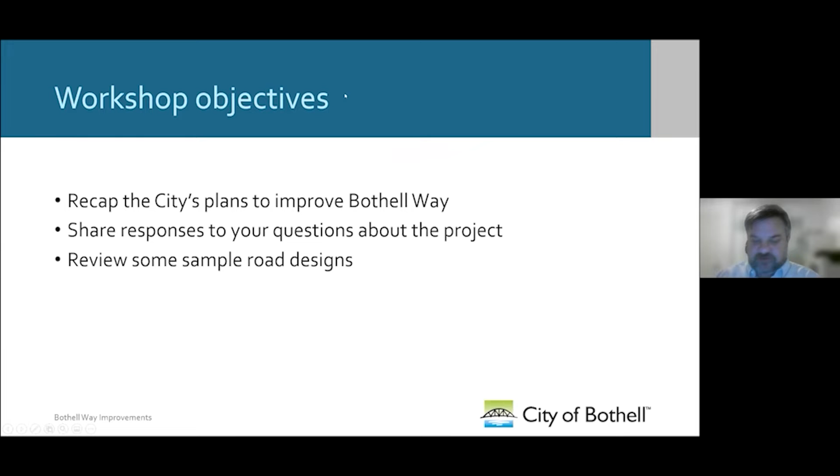Let's start with you, Jack. Good evening. Hi, and welcome to our second workshop on the Bothell Way Improvements project. Thanks for joining us. We are still somewhat early in the design process, but we do have some updates that we'd like to share with you.

We'll report back on some of the questions that we heard in the first workshop and share some of the reasons for the project, some sample roadway designs, a timeline for planning, and eventually construction.

This is our second workshop. There were some great questions in our first workshop in February. Today, we'd like to share some more answers to those questions that were asked. If we don't answer all your questions, don't worry. There are still more opportunities to ask us about the project at the end of today's presentation and in a few months in our online open house.

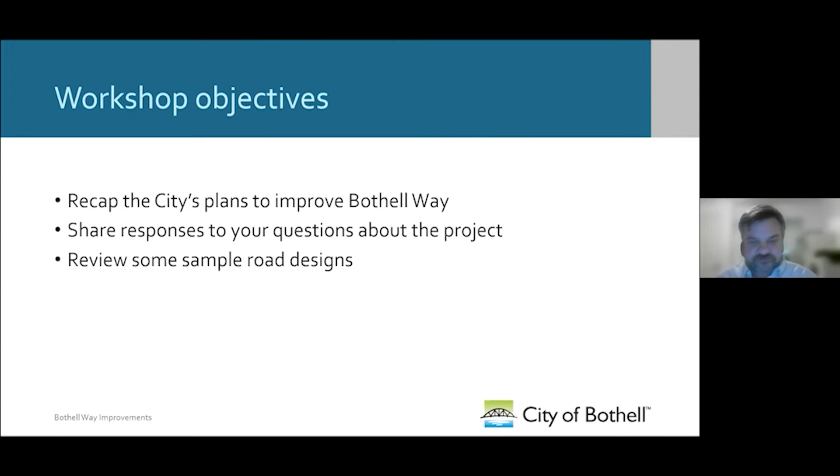As you know, Bothell Way is an important north-south connection between Snohomish and King counties. It links commercial and residential districts throughout our region, including Canyon Park and downtown Bothell, and then on to Northgate, Kirkland, UW-Bothell, and many other communities. These are the regional centers for employment and housing, and they're growing.

You've probably seen the improvements that the City of Bothell has made to provide a safer downtown for shoppers and residents, adding sidewalks, signage, and bike lanes. We hope to do the same for the residents and businesses in this section of Bothell Way too.

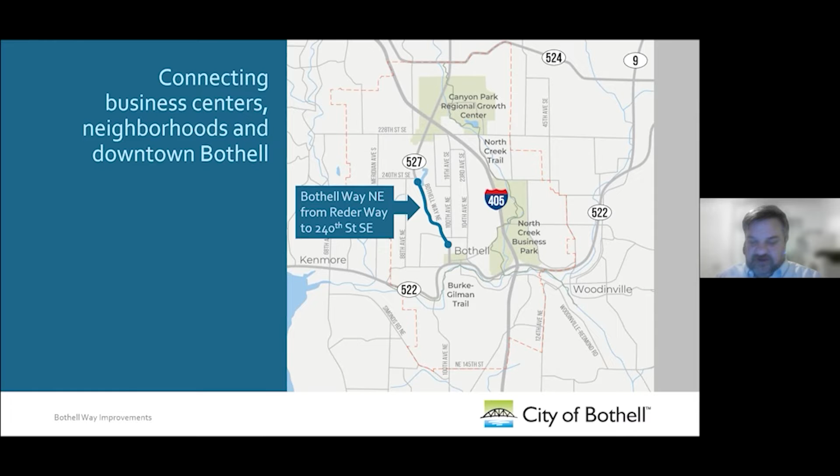With that, I'd like to hand it off to our project manager, Ross French, to update you on the current planning process. Thanks, Jack. Since the last workshop, we've been looking more closely at the current traffic counts, the road capacity, and area growth. Forecasts predict that car traffic volumes will double along this section of Bothell Way by 2040.

Housing growth continues throughout the region as well, and that includes this section of Bothell Way. But unlike some other Bothell neighborhoods, families in these neighborhoods don't have a safe way to get downtown from Canyon Park without using their cars. We've heard from parents whose kids would love to pedal over to visit friends in a different neighborhood, but there is not currently a safe way to do that. This project will provide safe access for them and everyone else who travels this road.

The Bothell Way Improvements Project will also help businesses, making it easier for customers to safely access buildings and parking, regardless of their mode of transportation. The next slide, please.

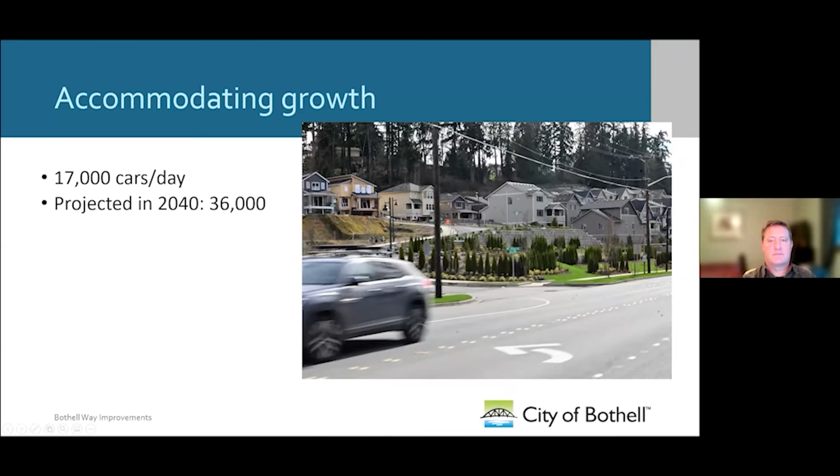The current road design blocks fish. We're currently in discussions with the Tulalip and Muckleshoot tribes and the Department of Fish and Wildlife to ensure the new road design permits fish to swim through the creek.

We plan to improve wetlands next to Bothell Way as well. Fish passageways will be designed so that small animals can also pass under the road.

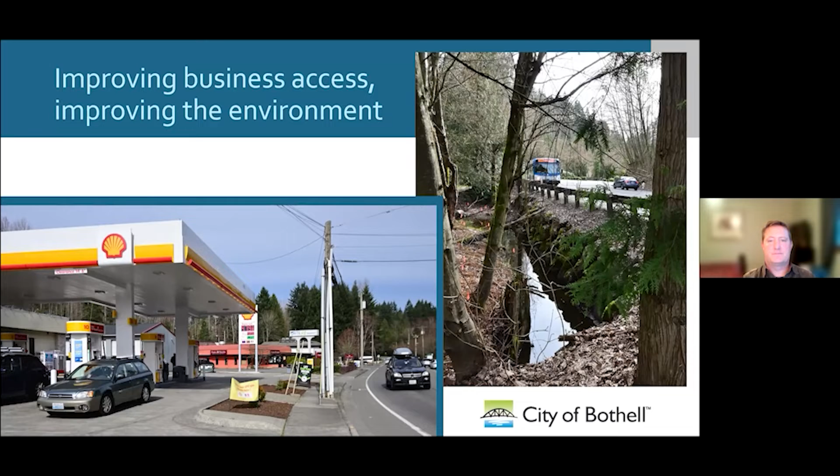This project will improve the bus system for the region by adding bus rapid transit, or BRT, along the corridor. BRT is a bus system that acts somewhat like a train. It comes more frequently and reliably than conventional buses and allows riders to enter anywhere along the bus. BRT is a very efficient way of moving a lot of people along a major transit route.

Community Transit's Swift Green Line BRT runs from Seaway Transit Center to Canyon Park Park and Ride. It runs every 10 minutes on weekdays and every 15 minutes on weekends, connecting Everett, Mill Creek, and Bothell.

As part of this project, we plan to extend the Swift line to downtown Bothell, upgrade signals and lane markings to help buses move through traffic, and make commutes better for all users.

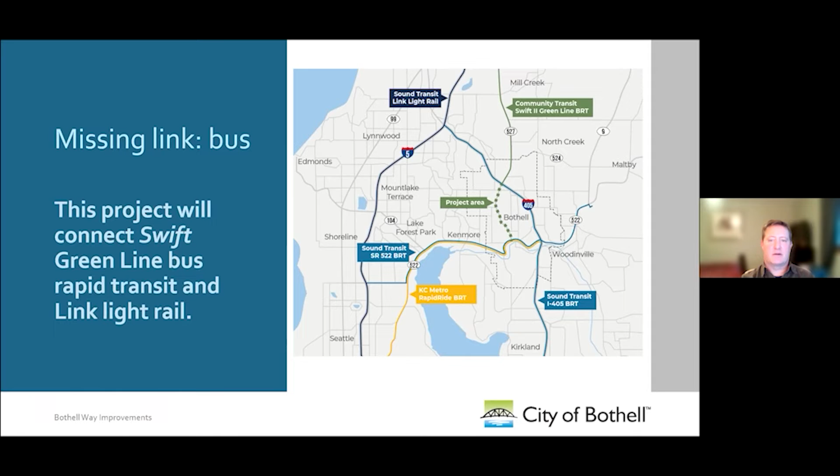Through these early conversations, we've heard some terrific questions from the public and wanted to address some of them here. You asked about the curves in this section of Bothell Way, when construction will take place, about lighting and landscaping, and what other amenities you can expect. Let's tackle those now.

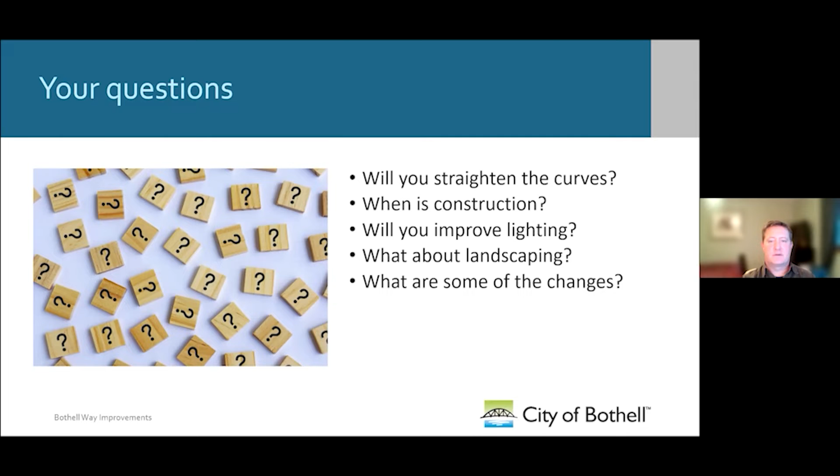We're also planning to not move the road much so that we stay clear of the wetlands to the west side of Bothell Way.

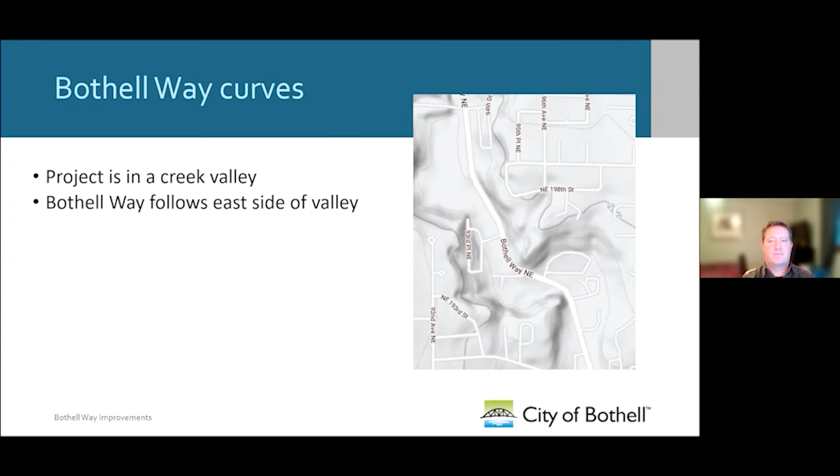So our construction timeline is phase 1 and 2, currently scheduled to begin construction in November or December 2025, ending in fall of 2027. Phase 3, or the middle section, will begin construction in November or December of 2027, ending in fall of 2029.

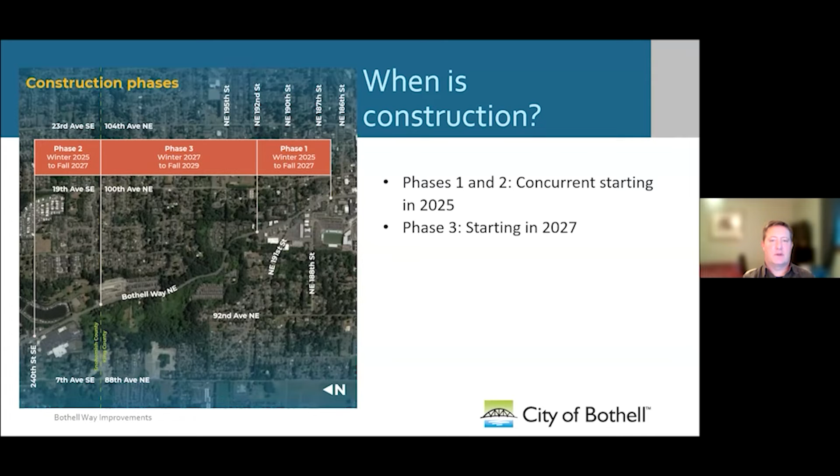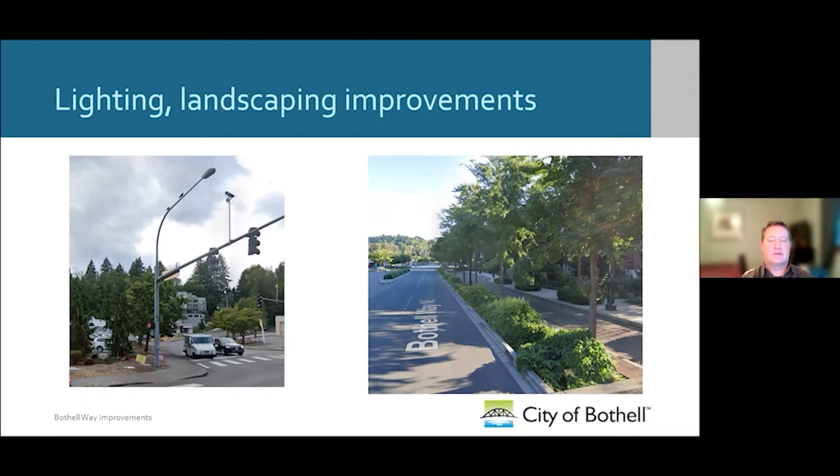As I mentioned, the project will add a center turn lane along much of the route. This will provide a way for cars to access businesses and neighborhoods without slowing the car traffic behind them, improving traffic flow, especially at the southern end of the valley, where it often backs up. The center turn lane will also help reduce the number of crashes.

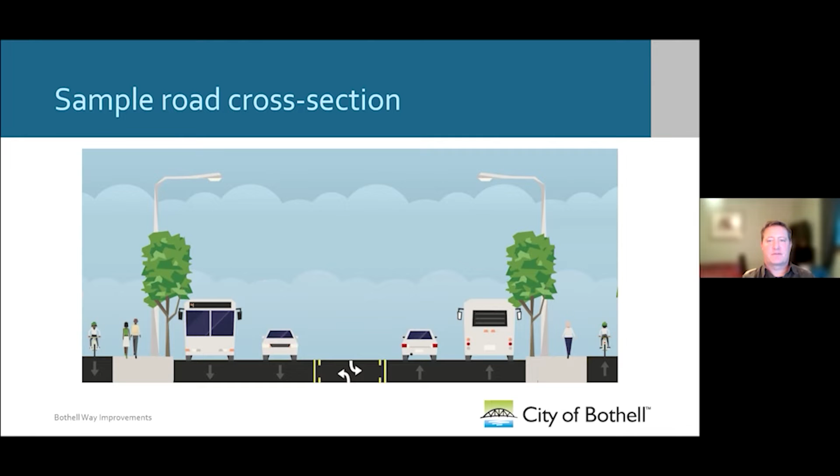As you saw in the sample roadway cross-section, this project will add protected bike lanes to Bothell Way. I'd like to take a moment to talk a bit about what protected bike lanes do and why they're important. Protected bike lanes are simply bike lanes that are separated via barriers, landscaping, or both from other users of the road. They make the road safer for everyone, not just for cyclists, but also for people walking and driving. They help remind people to drive slower and make it easier for drivers to predict the actions of cyclists.

Protected bike lanes and sidewalks bring customers to businesses and make the community a more attractive investment for businesses that are considering expanding or moving. Safe transportation options provide economic opportunity for people who can't or don't drive cars. They help folks to get not only to shopping and other businesses, but they help people get to jobs.

Within the first year of adding protected bike lanes, many cities saw an average 75% increase in the number of bikes. This makes sense considering 71% of Americans reported they would like to ride bikes more often, but are concerned about their safety.

Bike lanes on this stretch will connect cyclists to the many wonderful nearby regional trails. This will bring cyclists from the Burke-Gilman and Sammamish River trails into town and businesses.

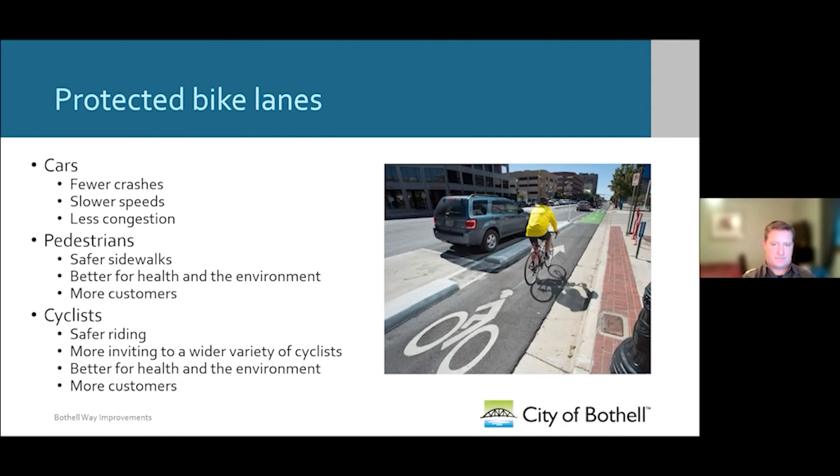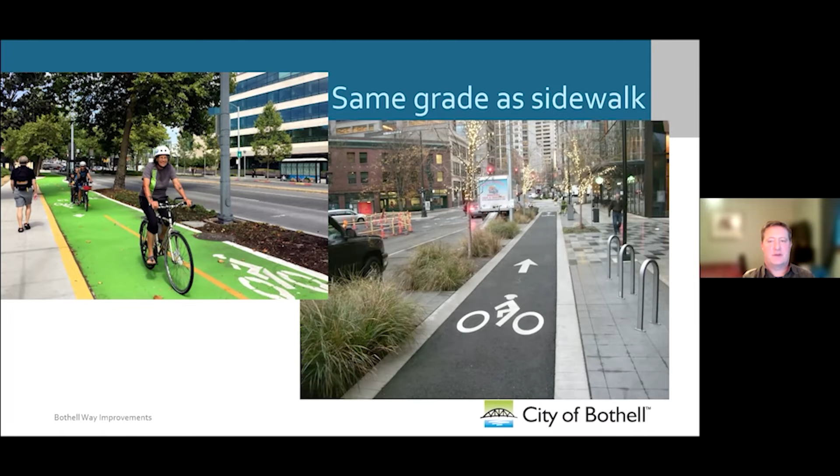The pros of this option are greater ability to provide landscaping and a larger separation from vehicular traffic. The cons are the possible conflict between bicyclists and pedestrians, especially at intersections.

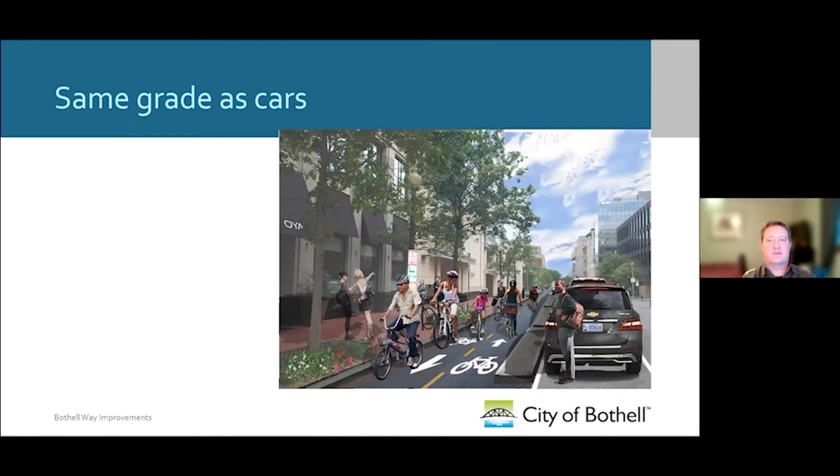Widening the road here will provide better traffic flow through this intersection. More cars will be able to pass through per green light.

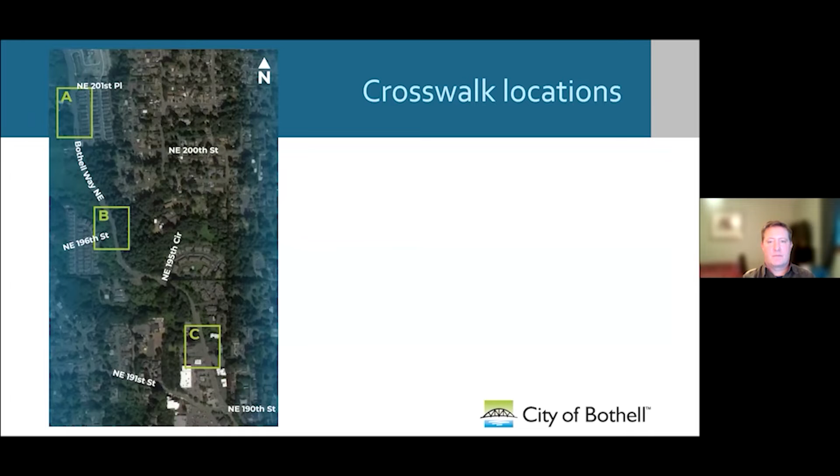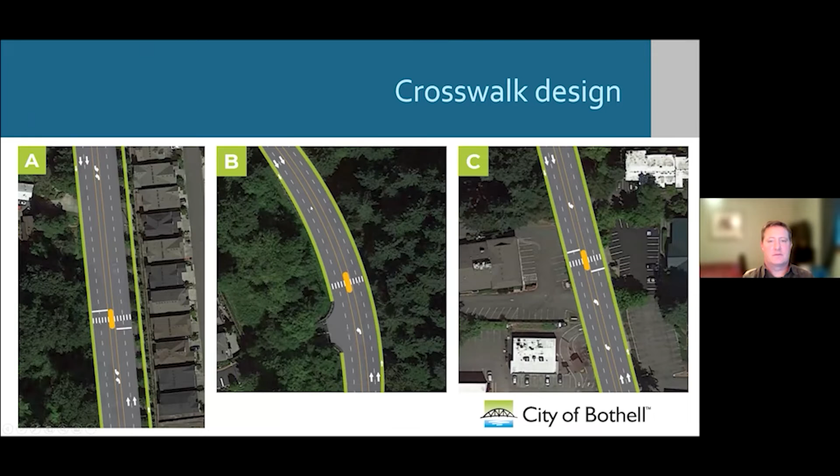Wanted to provide an update on how the team is advancing the design. Here are some of the things we're doing now. We're out in the field surveying to identify where the road and properties are and where improvements might go, determining the edges of wetlands and other features.

We're designing road improvements like bike lanes and locations for bus stops, and having conversations with the Tulalip and Muckleshoot tribes about preserving and improving fish habitat and passage.

We're working with Community Transit on bringing bus rapid transit and identifying the location of bus stops and amenities. We're also working with the Northshore School District to help ensure school buses can safely deliver students.

We're doing this research now so that we can plan the safest, most efficient roadway that works for the people that use it, whether they are in a car, on foot, using a wheelchair, or riding a bike.

I know you're probably interested in the timeline and when you'll see the improvements we've been discussing. As I mentioned, we're early in the project. We're looking at the environment and geography of the area, along with traffic data and forecasts of how much this road will get used for coming decades.

We're having conversations with you and other members of the community, along with neighbors and businesses. We're using the information we're collecting to come up with preliminary designs. Design is when we figure out where the roadway goes.

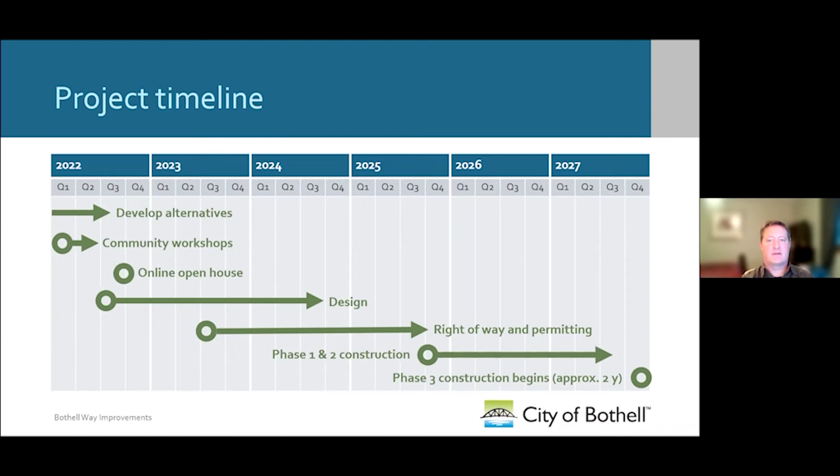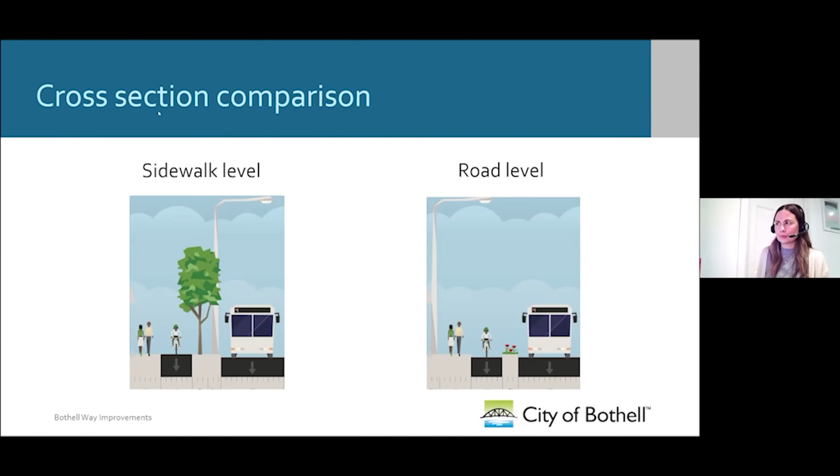I haven't actually figured out the time, but I can tell you that we expect the median traffic speed to increase from somewhere around 17 miles an hour to around 25 miles an hour. And the buses are going to be somewhat in traffic as they move along the corridor. But with the additional number of lanes, we expect that efficiency to be greatly improved.

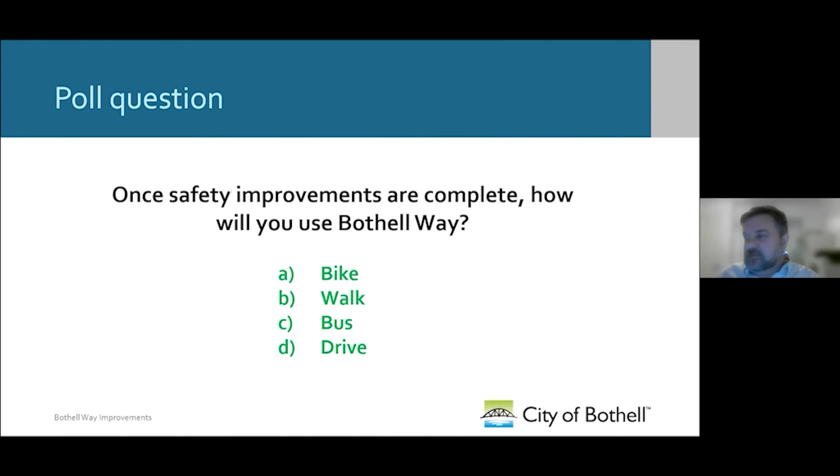A question from Sue about if the speed limit will increase. No, we expect the efficiency of the road to increase, but the actual speed limit itself will not change.

Another question from Andrew about which of the designs for the bike lane would cause the least amount of disruption and be the narrowest on the overall footprint. They would actually be pretty close to the same width, whether the bike lane is up by the sidewalk or down on the road. What would change is the width of the landscaping strips, because if the bike lane was down by the road, we'd have to have something in between the bike lane and the cars, and also between the bike lane and the sidewalk. But if we move the sidewalk up next to the bike lane, or the bike lane up next to the sidewalk, then we could have a wider planting strip.